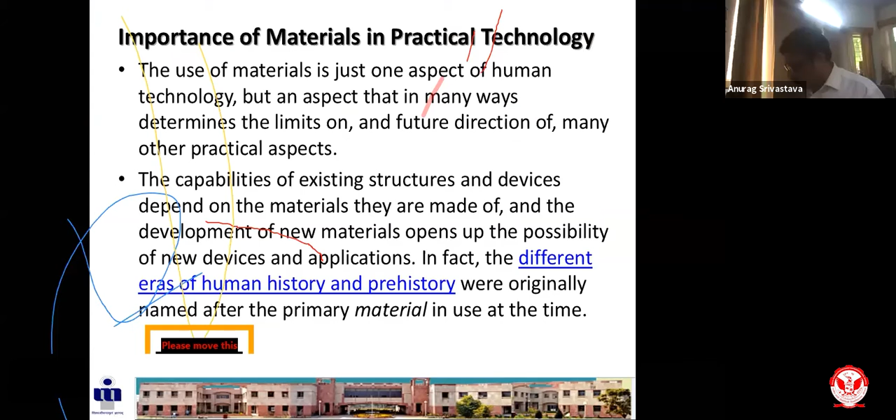If they open up the possibility of new devices, a variety of applications are possible. Going back to the history of materials by era, we talk about various stages: the Stone Age, where various developments took place, then the Bronze Age, with further material development, the Iron Age, the Middle Age, the Industrial Era, and now what we are in, the Information Age, where we mostly talk about one very important material: silicon. Now people are also thinking, can we replace silicon with some other material?

Everybody has talked about Silicon Valley, but people... it's going off, I don't know why.

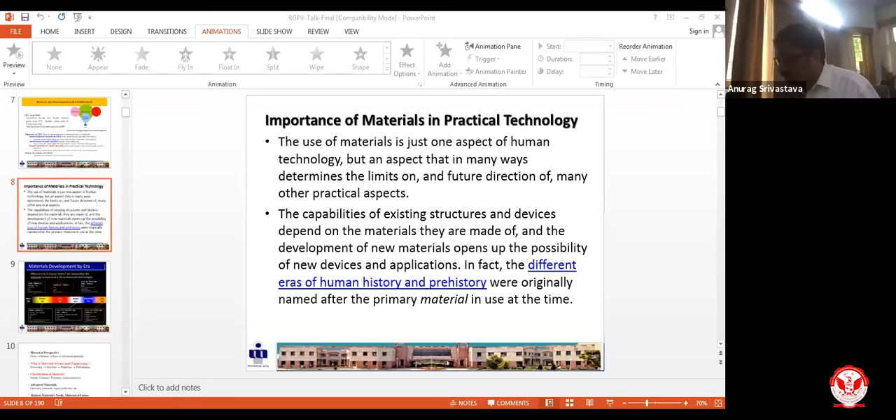So I was just talking about silicon. Silicon has been a very important and crucial material in the electronic industry, and everybody knows this, that's why people talk about Silicon Valley. Everybody knows that silicon was not the first semiconductor material discovered which revolutionized the world, but basically it was germanium. But people have realized the importance of silicon, and there are many technical answers for why people should prefer silicon and not germanium. Those from the electronics background understand very well why people prefer silicon.

It is basically the property of the material which leads to selection and suitability of a given material, and of course the availability of the material is also very important. For a layman, it's important to know that germanium is not easily available in the market in pure form, whereas silicon is available. This is a very layman answer for why people should prefer silicon. But the technical answers are that a variety of properties of silicon are responsible for selecting it in electronic device manufacturing, like its melting temperature, its breakdown voltage, and the thermal stability of the material, which is also very important.

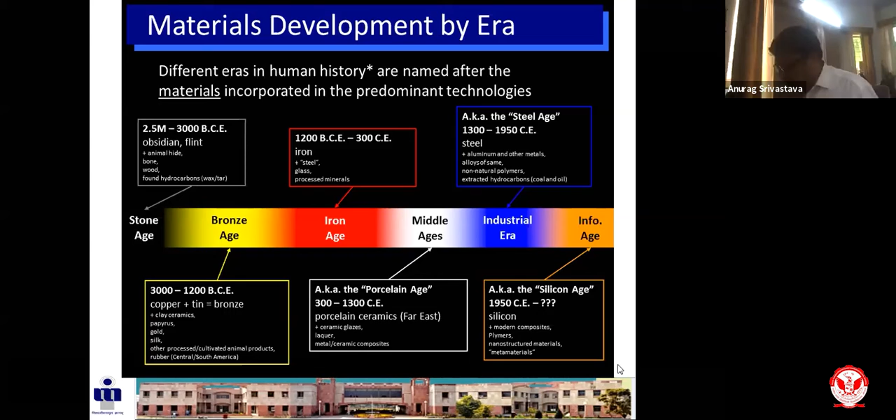So basically, as I said, you start with the Stone Age, move to the Bronze Age, move to the Iron Age, when you talk about steel and others, and now we have one bigger umbrella of material we call advanced material, or smart material, or these days other exotic names given to this material. But there are various things associated with the engineering of material properties as well. Various efforts have been made in processing the material, and in manipulating its structure. When you manipulate the structure, the property can be manipulated, and once you manipulate the property, the performance of the device can be tuned as per the requirement. So various materials are available, like metal, ceramic, polymers, semiconductors, and modern materials, depending on future needs, and you can categorize them in different ways. I have listed some here, like biodegradable material, nanomaterials, or smart materials.

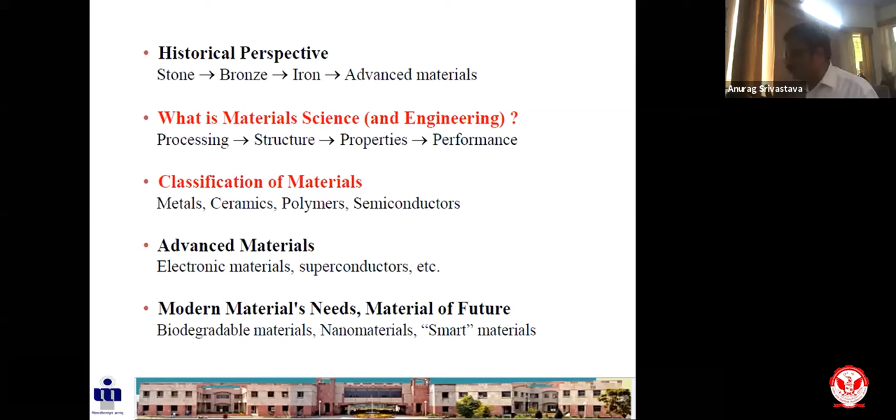Let's go back to the history: does history occur in a straight line? If you plot a change-versus-time graph, does it look like a straight line? No, actually it is not. It is basically in steps. So you have to start with prehistory.

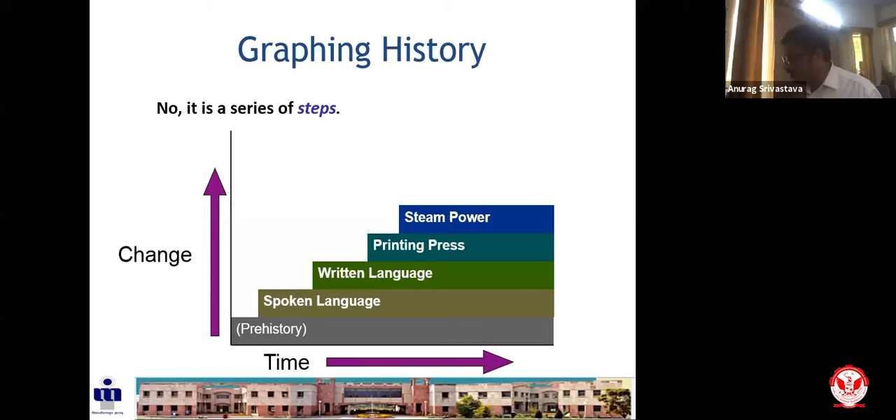People talk about the spoken language, people talk about the written language, and then there is the development of the printing press, and steam power came into existence. In the Industrial Revolution, the last 2 centuries have seen a series of steps. When after the steam engine, railways came into picture, automobiles, and people have seen how computers have been introduced around the 70s to 80s, where semiconductor materials played a very important role.

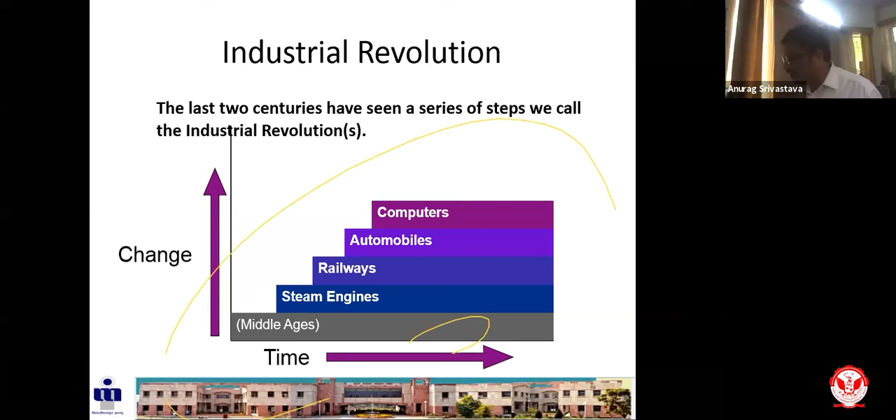If you talk about the Industrial Revolution, within that there are various categories of revolution. The first revolution took place in the steam engine, textile industry, mechanical engineering. The second revolution, from 1840 to 1900, was basically located in Europe, where railways and steel industry flourished a lot. The third revolution was electric engine, heavy chemicals, automobile, consumer durables. The fourth revolution is basically based in the Pacific Basin, California and Japan, where organic chemicals and computers were developed. Each industrial revolution marked a major change, a big step, which revolutionized social, political, and economic history.

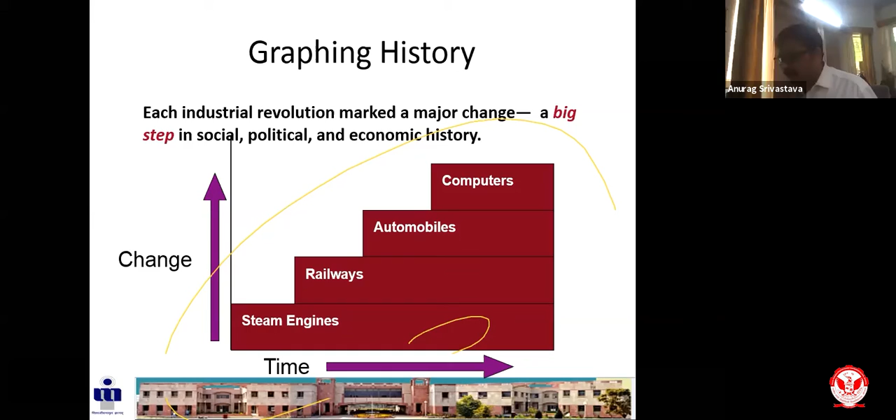So this is not a step function, actually. This has taken the shape of an S-curve, right? So it is basically a continuous variation of development that took place.

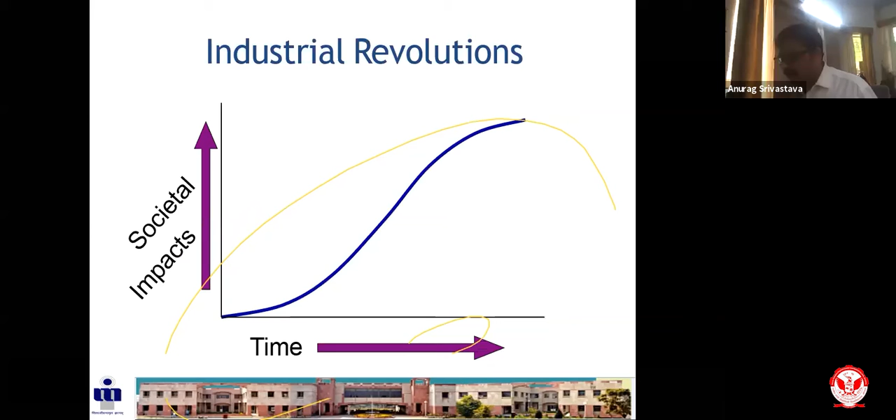The fifth revolution is basically around 2010, and it is still existing, when people talk about nanotechnology and molecular manufacturing, which is located mostly in the developing world - China, India, Brazil, and other developing countries, or countries moving towards developed nation status, mostly focusing on the nanotechnology and molecular manufacturing world.

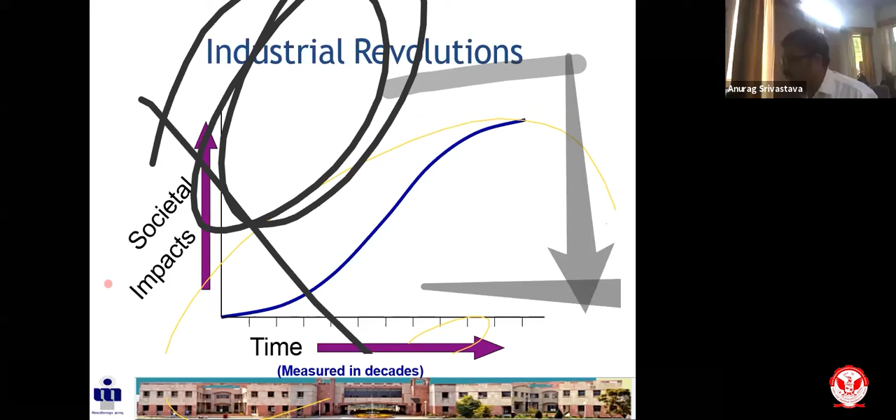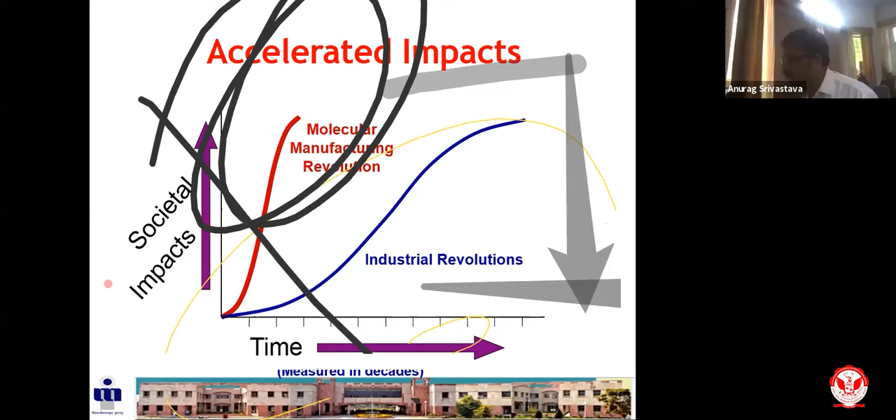This has not only changed industries, but has also impacted society a lot. That's why you can see it is again not following a step function, but rather an S-function. Molecular manufacturing has changed this complete world, and you can see in this graph a lot of societal impacts when people moved from simple solid materials to molecular and electronic molecular manufacturing. After computers, when people were mostly interested in solid state materials, now people have moved to molecular materials, or organic polymers, and have seen changes in the nanotechnology world even - that's what we call the next big step, and it has impacted a lot.

Someone is putting a scratch on the screen. I don't know who is doing that.

What is important here is why this nano world is so fascinating, why it is so important. It's basically that size matters, as I said, and shape - two things are very important. But the most important part is how many atoms are lying at the surface. The surface becomes very important, and that's how you classify material from bulk to nanomaterial. In bulk material, you don't find many atoms on the surface, and that's why the properties are different. When you move to the nano dimension, you find most of the atoms lying at the surface, and that's what this slide explains.

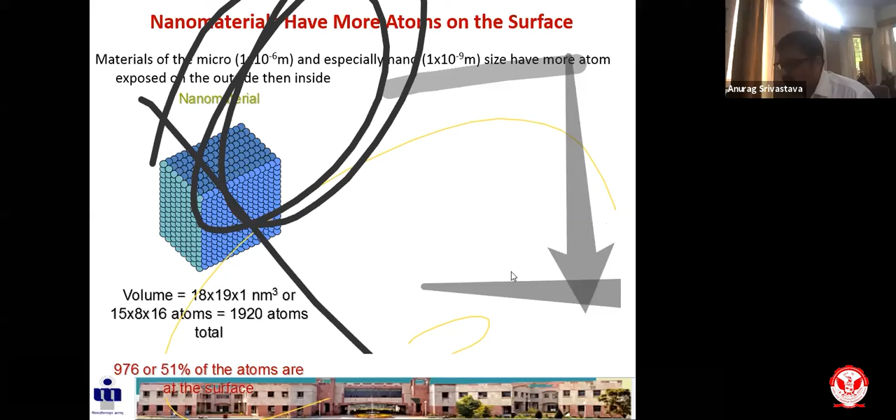That's why I said this dimension is so fascinating. This picture is not new, everybody knows it, and we have restricted ourselves to this dimension, 0.1 micro to 0.1 nanometer, right? That's how most electronics people currently are interested in working in this domain, and they have moved from microelectronics to the nanoelectronics domain - again because of the material. You can see in this picture, those who are already aware, who have already gone through the lectures of nanomaterials or nanotechnology.

They know this picture very well. This particular picture basically talks about how size matters a lot. If you just change the size of the material, the complete optical property of the material changes, and not only the optical property, but other properties of the material can also be changed because of that.

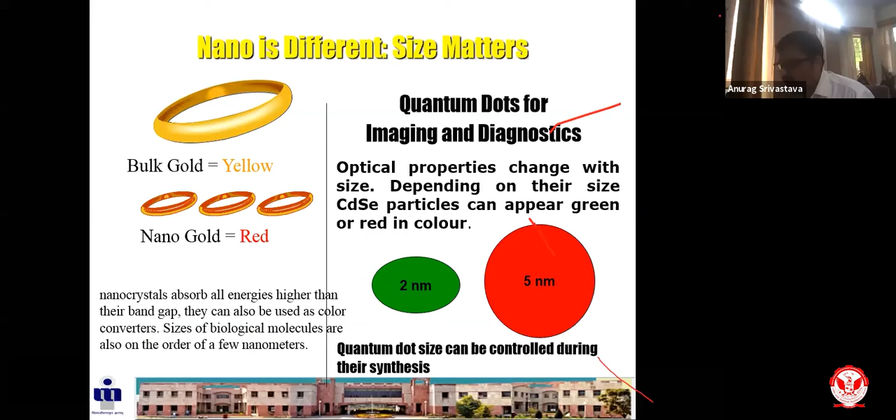Cadmium selenide was a very important material as a quantum dot, which has been recognized as a very good optical material, changing color from green to red, or red to green, just by changing the size from 2 nanometer to 5 nanometer. Similarly, bulk gold is yellow in color and nano gold is red in color, because many atoms lie at the surface, and that's how they change the behavior of the property of the material.

For example, in this picture, bulk gold has a melting point of about 1064 degrees Celsius, and its color is gold. If you keep changing the size from bulk down to 100 nanometer, the melting temperature goes down to 1000 degrees Celsius, and lambda max reaches 575 nanometer and 521 nanometer. If you decrease the size further to 20 nanometer, or keep decreasing it to 1 nanometer, the melting temperature reaches 700. So the material has become softer, from harder to softer, and the optical property also changes - you can see the colors changing.

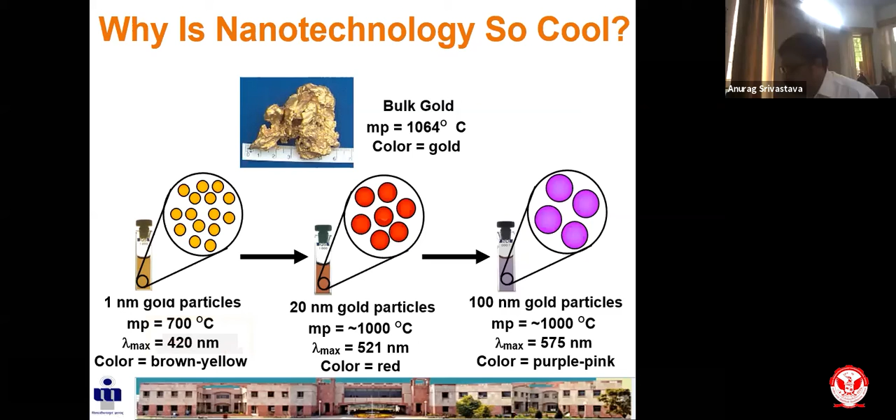This word is not new for biology people, it was always there for them. But for physics and chemistry people, or electronic people, they feel it's a new word because it has completely changed the electronics world.

We don't talk much about bacteria and cells here, but of course dealing with these atomic, nano dimensions, we can deal with the sensing of various cells, bacteria, and viruses as well. This picture is also not new, everybody knows it, so I won't focus on this part. The gist is that nanoscience and nanotechnology are truly interdisciplinary, and people from various disciplines can work together.

Whenever you talk about nanotechnology, it's mostly dealing with the design and construction of useful technological devices, and the size, as I said, is a billionth of a meter. Nanoscale devices will be built of small assemblies of atoms together, so you can call them at the nano dimension.

When you talk about nanoelectronic components, you talk mostly about transistors. Various levels of transistors you have studied in electronics courses - when dealing with FETs, field effect transistors, you are dealing with quantum dots, or silicon, or single atom transistors, or single electron transistors, or spin devices. People have moved to a different world now. Spintronics is another very important area, dealing with the spin of the material and how the spin influences the property of the material. You can also talk about superlattice arrays and many other devices that have emerged.

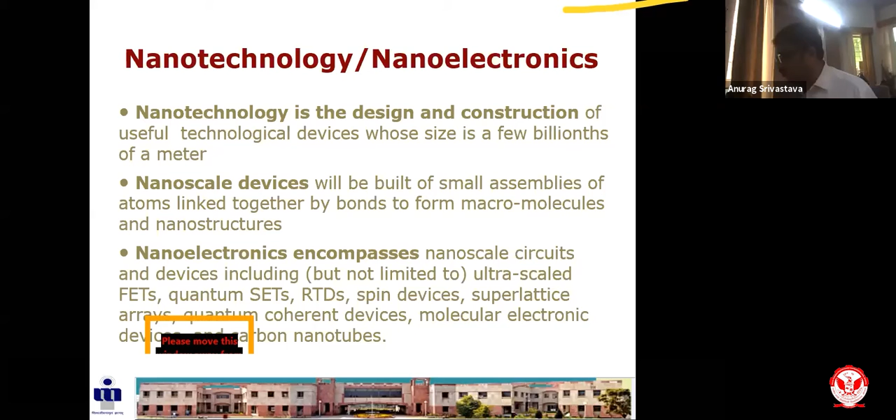So there is the motivation for this nanoelectronics world, because of the various limitations you've seen when talking about the scaling of devices - the physics changes from classical to nano dimension, to quantum. It becomes very, very difficult as soon as you reach the nano dimension, especially 10 to the power minus 10, to know which science or physics laws will be useful to describe the various changes in the material, and what other properties of the material change.

So you are moving from classical to quantum domain. When dealing with classical, you normally believe it's the era of 1984 or the 80s, when talking about diffusion of current. When dealing with bulk or silicon material, the motion of the electron was random motion, a random walk. As soon as you move to the quantum world, we normally talk about ballistic transport - meaning the time it takes to move from one end to another, for example from source to drain.

From one electrode to another electrode, it takes very, very small time, because during that time it also does not lose the energy. So when Professor Sunil Gupta was talking about the energy consumption should be minimal, people need to think about how they have moved from diffusion to the ballistic stage.

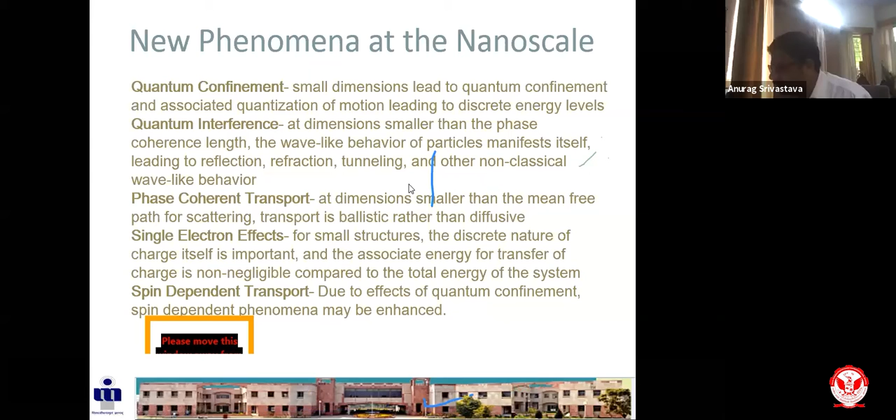So basically, a small chip has transistors of small size, and whenever you're dealing with a small transistor size, you are talking about the length of the channel. So the length of the channel becomes very, very important, and that has changed from micro dimension to nano dimension. Because of that, the phenomena associated with the micro dimension have changed, and people who were dealing with classical mechanics have started dealing with quantum mechanical things. So you are well aware of this good formula.

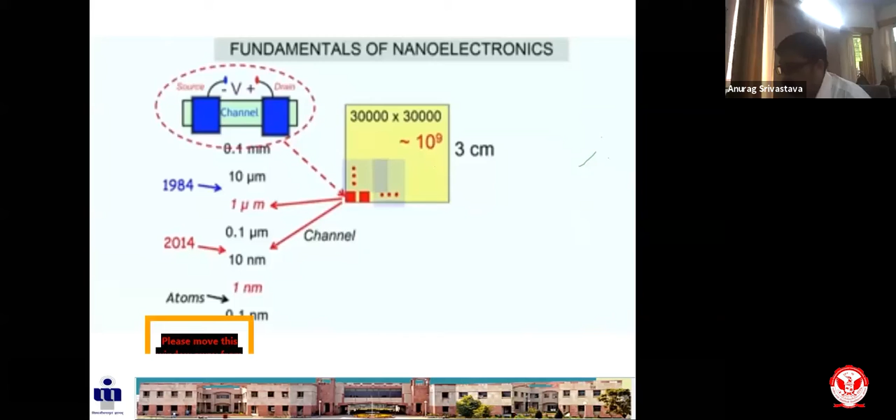People have talked about simple Ohm's law. When talking about resistivity, they talk about the length of the channel, the cross-sectional area. This formula is not new, it's a very, very old formula - everybody knows Ohm's law, right? But as soon as you move to the nano dimension, this law is no more valid.

So we have to think about other laws where the length of the channel plays a very important role, and the mean free path also plays a very important role. So L by lambda plays an important role. At the same time, as soon as you move to the quantum, nano dimension, this resistance is very important, where Planck's constant and the charge of the electron also play a very important role. This normally comes to about 25 kilo ohm. So this L by lambda becomes very, very important - that basically leads you from switching in the nano dimension to the classical, bulk dimension.

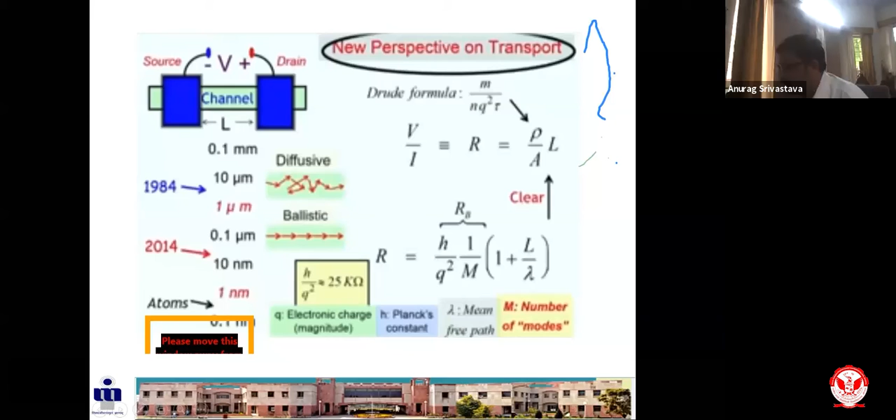As soon as you talk about the size, it basically changes the various properties of the material. It starts from physical property, it changes chemical property, electrical property, mechanical property, optical property. So you can exploit the variety of properties of material in a variety of applications.

Various initiatives have been taken by the Indian government as well as the government of US and other European countries, called the NNI, National Nanotechnology Initiative, encouraging new contributions that were not possible before. This initiative took place around 2000, covering people working on novel phenomena, manipulating the properties of material, and exploiting these properties in various device applications.

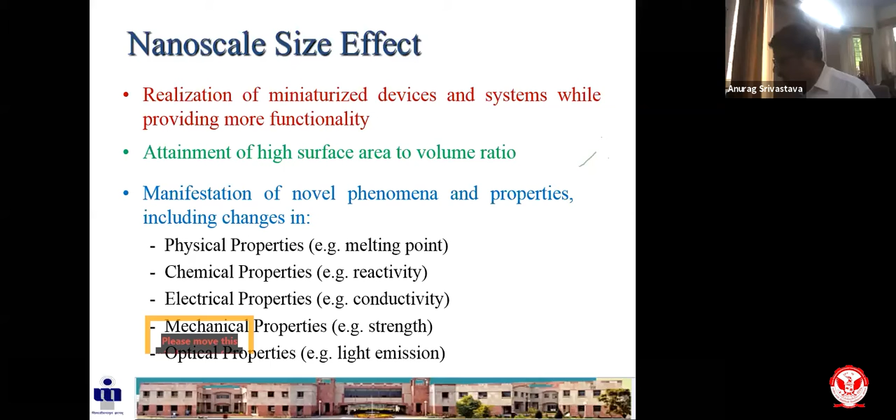Various discipline people have started working on this, but the role of physics, medical science, and chemistry people becomes very important here. That's how you can see a lot of technologies have been developed and a number of patents have been filed by a variety of people.

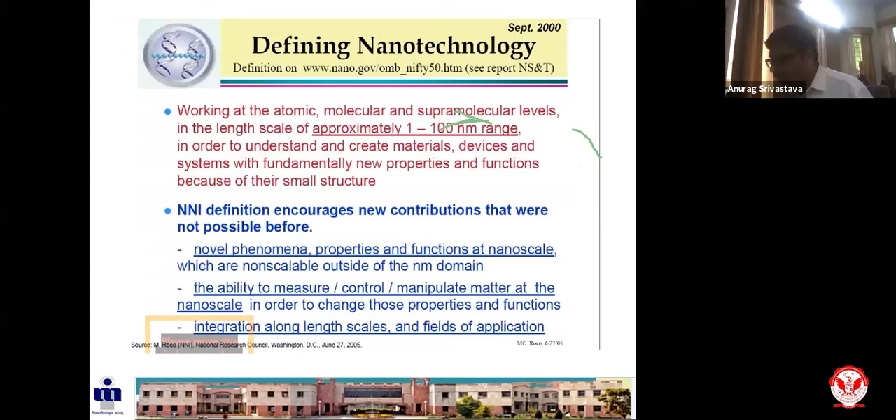Thinking of the decade from 2010 to 2020, you can talk about the various generations of the nanotechnology world: first, second, third and fourth generation. We have moved from third generation to the fourth generation, from nanosystems like guided molecular assembling, 3D networking, new system architecture, robotics or supramolecular systems, to mostly molecules as devices or components, where we are dealing right now with single electron devices or quantum dot-based devices, and that has revolutionized the field.

One very important component, since everybody is from an electronics background, they understand mobility is a very important factor. Whenever you move from solid material to organic materials, mobility directly gets affected, and you find a lot more variation.

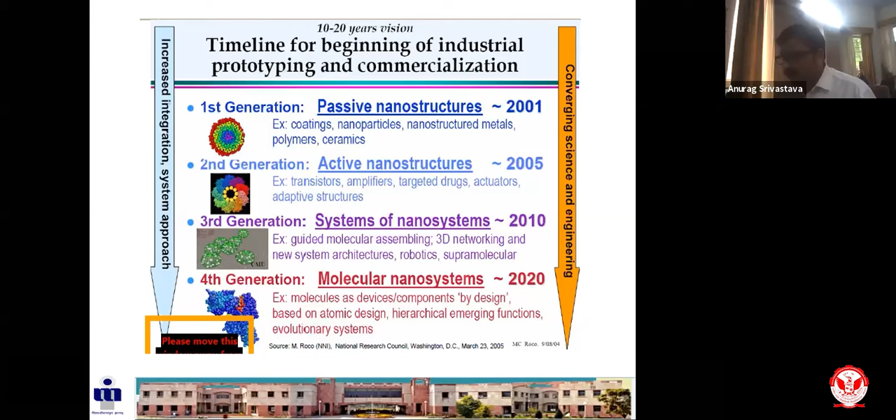A few years back, people started thinking about whether Moore's law is still valid, and at the same time thinking about whether silicon can be replaced with some other material, because people want to increase the chip density. Increasing chip density basically means many transistors, diodes, or other electronic components can be accommodated in a small chip of 3 by 3 centimeters or 1 centimeter by 1 centimeter.

So what they have done is transistor scaling. When you talk about scaling, you normally talk about decreasing the technology node, or the channel length. People have moved from the 90 nanometer node in 2003 to whatever is right now, talking about below 10 nanometers. IBM is working on transistors below 10 nanometers.

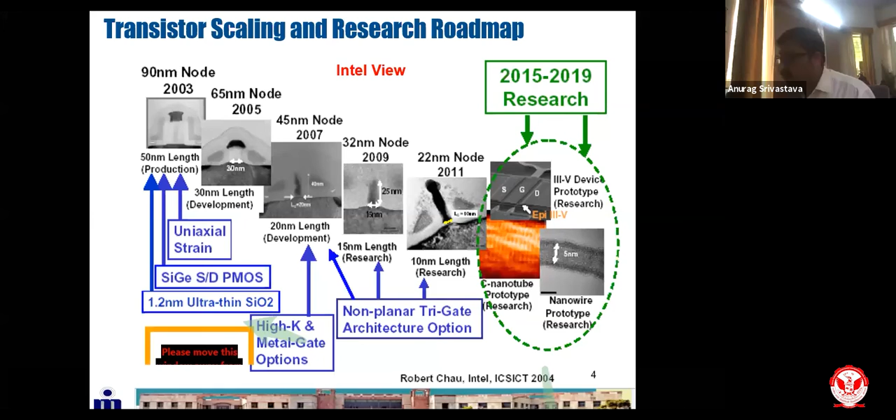They started with simple silicon material, then moved to the alloy of silicon and germanium. They worked with dielectric materials, high-K material, or moved to low-K material. Initially they were interested in low-K material, then moved to the 65 nanometer technology node. They again manipulated things, going to 45 nanometer with a channel length of 20 nanometers, and at the 32 nanometer node, they worked with a 15 nanometer channel length.

In this process, you can see that the miniaturization of the material is not possible anymore. So what else can be done in place of silicon? Other things can be done by replacing silicon with 3-5 compound semiconductors.

That was one option when gallium arsenide was introduced in the market, because the band gap of gallium arsenide was around 1.4 electron volt, while silicon is 1.1 to 1.2 electron volt. People believed that gallium arsenide may replace silicon, but it didn't happen, because the thermal stability of gallium arsenide was not good, and other properties of gallium arsenide were also not good.

People left the idea of gallium arsenide, and later people believed we could move to another material like carbon. That's why when we moved to 2010, graphene revolutionized the world. Actually, it was discovered in 2004, but it got the Nobel Prize in 2010. That's why people mark this year as the landmark year for graphene.

This carbon electronics is very important these days, because the same material in different shapes and dimensions can play the role of a semiconductor, a metal, or an insulator. So anything is possible just by playing with the size and shape of the carbon material. People have moved now to the current world of carbon electronics, instead of silicon electronics. They moved from silicon electronics to 3-5 compound semiconductor electronics, and now they have moved to carbon electronics.

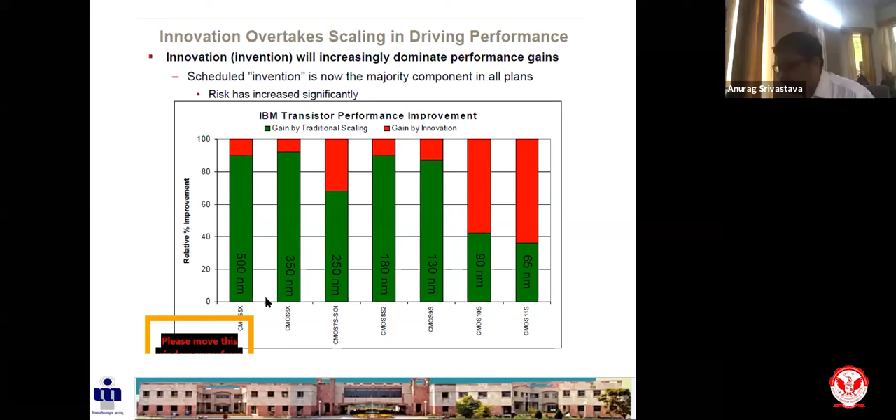So that's how we moved from having vacuum tubes around 1940, before the era when we started talking about semiconductors around 1950. Before that, we were mostly using vacuum tubes. Then we moved to other devices, semiconductor-based devices, which were dealing mostly with microelectronic size, micro size of the channel length. And now, from 2010 onward, we are mostly dealing with nano dimension devices as well as nano dimension materials.

So now the question comes that nanotechnology development cannot be decided only by nanotechnologists. Nanotechnology is a very big umbrella—it can accommodate people from physics, chemistry, biology. In almost every discipline, people can be accommodated under this umbrella.

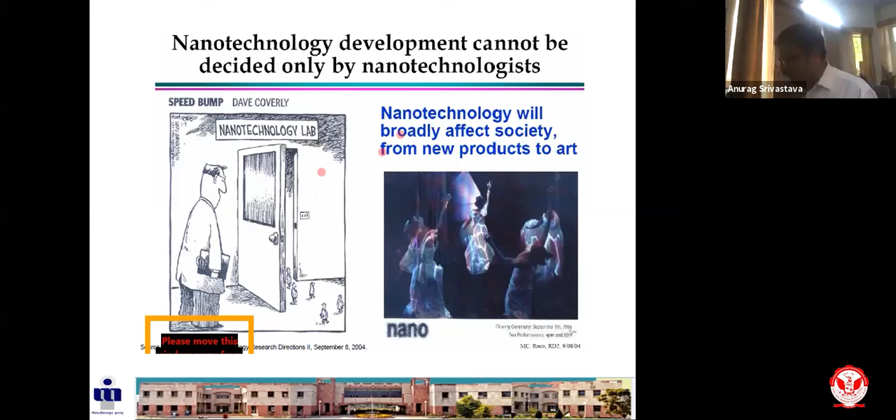So we need to focus more on the fundamentals. And when we focus on the fundamentals, we need to focus more on the physics as well as the basic laws of chemistry of materials—how the atoms are interacting with each other, what kind of exchange of energy, what kind of laws are there, how the atoms are joined.

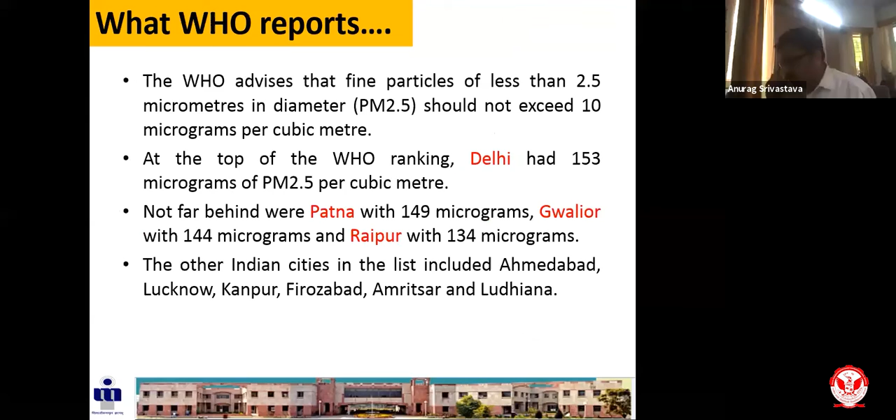So now, how do these toxic gases affect various parts of the human body? For example, various toxic gases present include H2S, which is a very important toxic gas, NOx in the form of NO as well as NO2, which are very important pollutants. Volatile organic compounds are also very important, and ammonia is very, very dangerous. Recently you've seen the news also about carbon monoxide and carbon dioxide, which are also very important, and many other gases are equally important.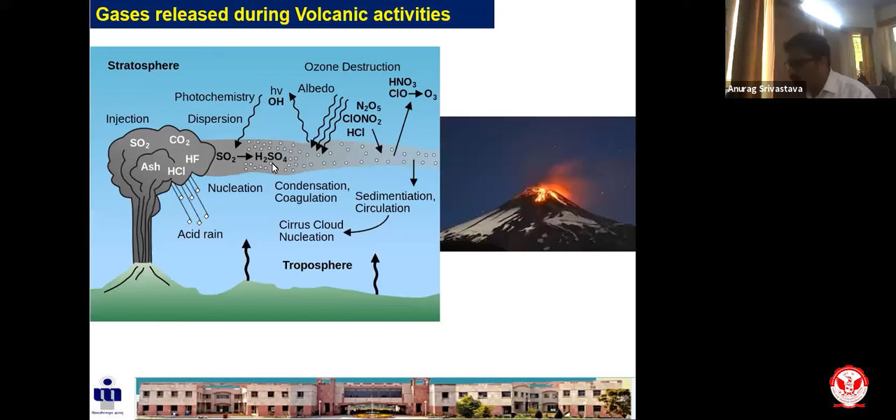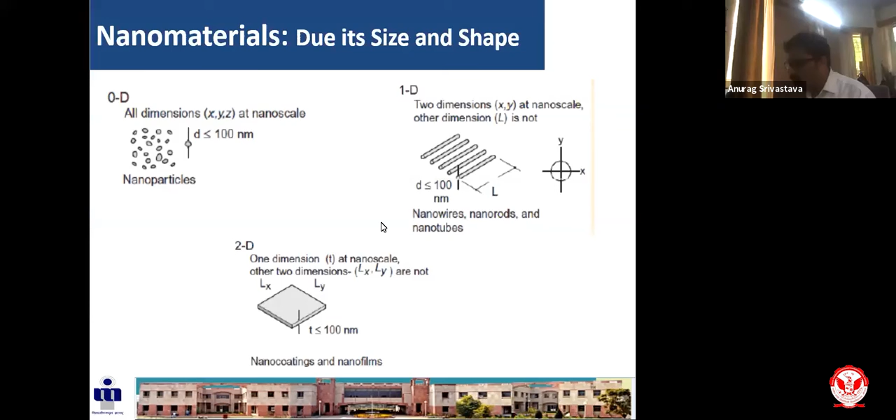When people were working on a variety of dimensionalities of material, they believed that 2-dimensional materials were not possible - they put a question mark on the stability of 2-dimensional material. But later, in 2004, when Andre Geim and Novoselov did the experiment, they found that this material is stable, with a variety of beautiful properties of the 2-dimensional material. That's how later on they realized that graphene can be considered the mother of other carbon materials, like 3-dimensional material, fullerene or quantum dot, or graphite itself, or the carbon nanotube folded in a different way.

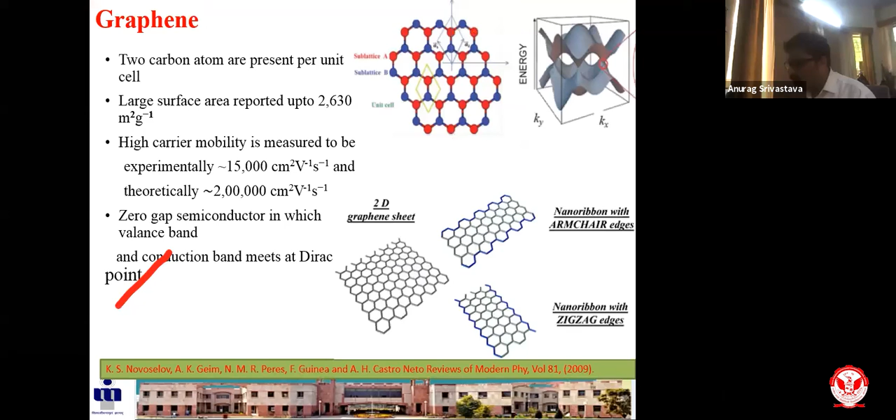So I'll not talk about this material anymore. Let's come directly to the second part of the material. Like, as I said, the 2D nanostructure graphene sheet is a zero band gap material. Normally people call it a zero band gap material, or sometimes a semi-metallic material. The structure is flat. A similar material is boron nitride sheet.

So whether the zero band gap is advantageous or not advantageous - of course it is not advantageous. Zero band gap material is not good, so you need to analyze the property of the material. We have found boron nitride is another very good material, which has a band gap of around 4.8 electron volts, but this band gap almost reaches the insulating stage.

And people have then worked on silicene, germanene, phosphorene, and other 2D materials. Of course, the structure of the material also plays a very important role - whether it is a flat structure or a buckled or puckered structure. That's how you can decide the property of the material in different cases.

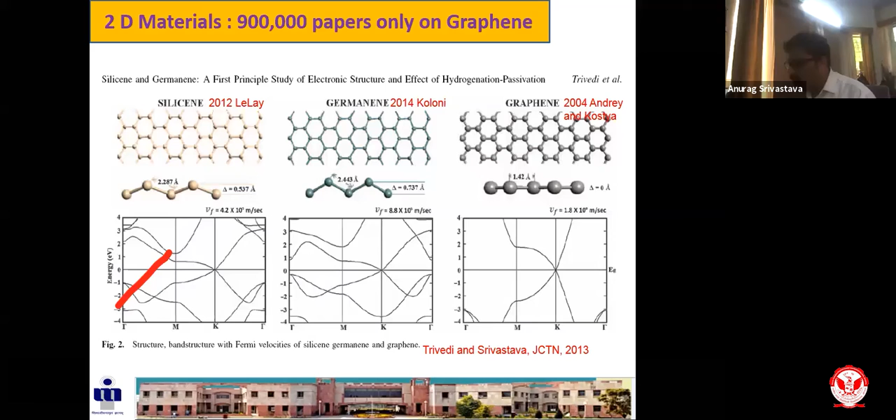Let me just come to the sensor part. So what is a sensor? Basically, it is a device that detects events or changes in a quantity and provides a corresponding output, generally as an electrical or optical signal, right? And your own human body also has a lot of components as a sensor.

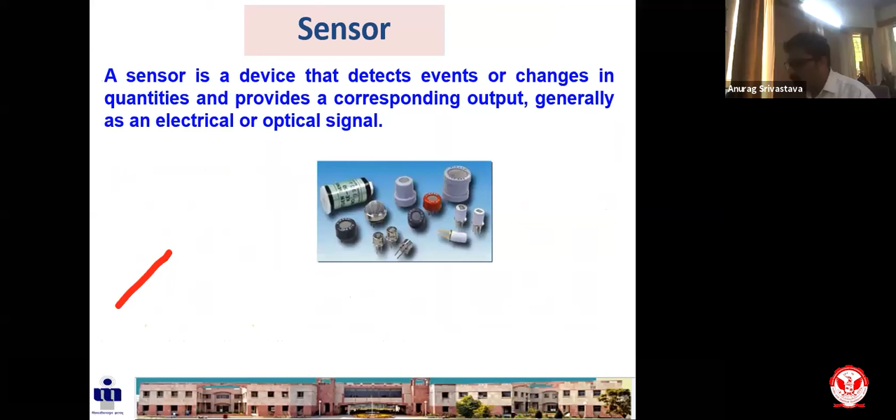You know this very well. So what you are doing when you are sensing, basically, is either seeing the changes in mechanical quantities, seeing the change in thermal quantities, observing the change in optical quantities or electromagnetic changes, or observing the changes in chemical quantities.

So if you look at it from the electronics perspective, basically you are more interested in the active region. Go back to that same device I talked about - we have got two electrodes, and in between there is a channel region. So we are mostly dealing with the channel region.

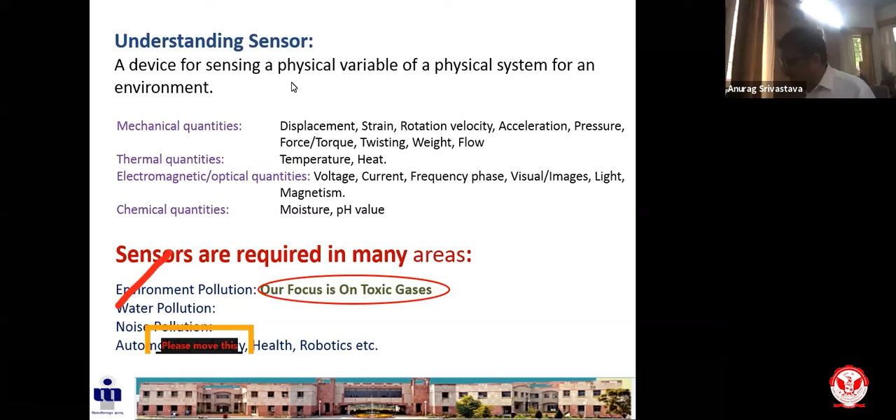So when gas approaches this channel region, what happens basically? It changes the signals, and how the signals can be analyzed basically through various data processing mechanisms that tell us about the presence of which kind of gas or chemical is present in the environment.

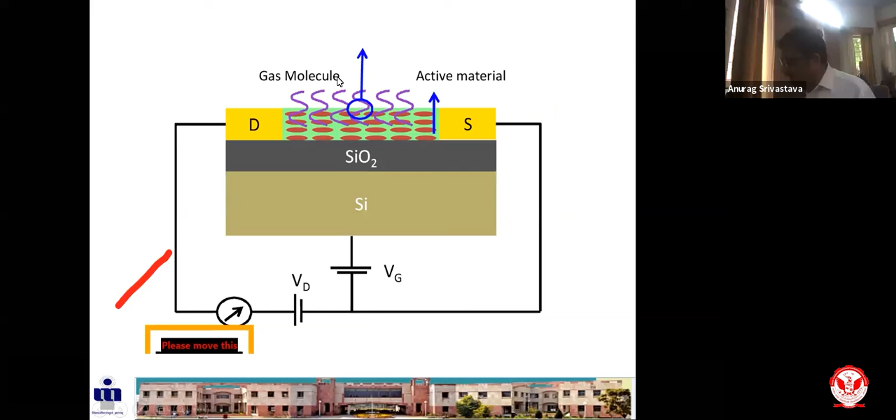So you can get the change in current because of change in the gate voltage, or you can get change in the current because of the presence of any extra molecule of gas or chemical near the active region, active material. But now the question is how to decide that the sensor you have developed is a good sensor or a bad sensor.

There are a variety of parameters for that, but the most important parameters are sensitivity - how much sensitive the surface is - and selectivity. For example, in a particular environment with n number of gases, for which gas is this particular material a good sensor? So selectivity is another very important parameter, and the thermal stability of the material, because it decides the lifetime of the device.

Other parameters are of course equally important, but these are very, very important. Another important parameter here is the response time - how fast it gives the change in signal.

A variety of materials have been proposed by a variety of scientists. They started talking about metal oxide semiconductors, the old one - people still work on metal oxide semiconductors, mostly oxides. People work on nanocomposites, people are working on polymer-based sensors, but at present, the current industry is mostly focusing on CNT and graphene-based transistor sensors.

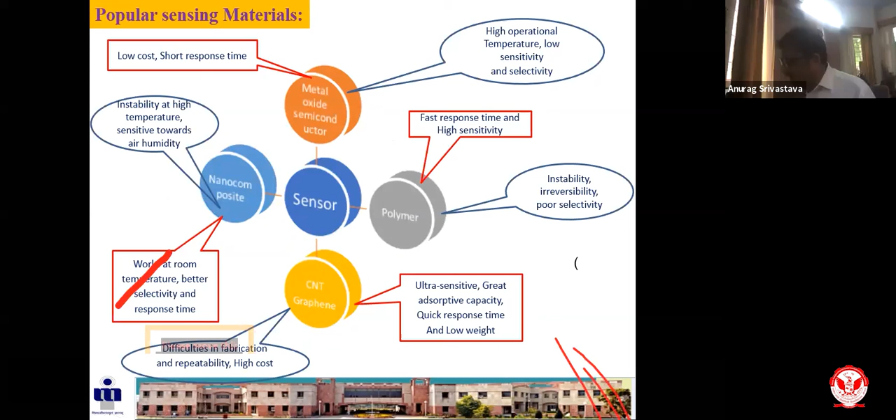Now, as a theoretician, what we do basically, the very first step, as I said, is that stability of the material becomes very, very important - whichever material you have to use. Let me just take one example of sensing hydrogen fluoride. You have to sense this hydrogen fluoride gas by using a simple CNT, and CNT can be manipulated in different forms - like you can have a simple CNT as a pristine or pure CNT.

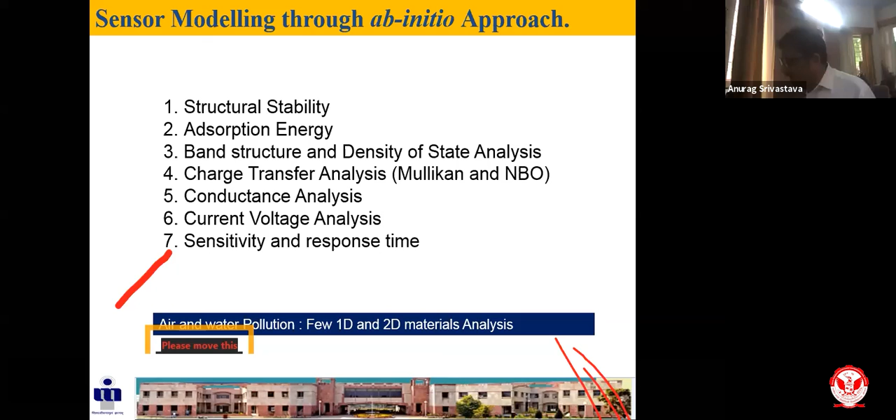You can have the functionalized CNT, making it a P-type or N-type CNT, functionalized in the form of, let's say, boron doping or nitrogen doping. And that's how the first thing you do, you make a geometry optimization.

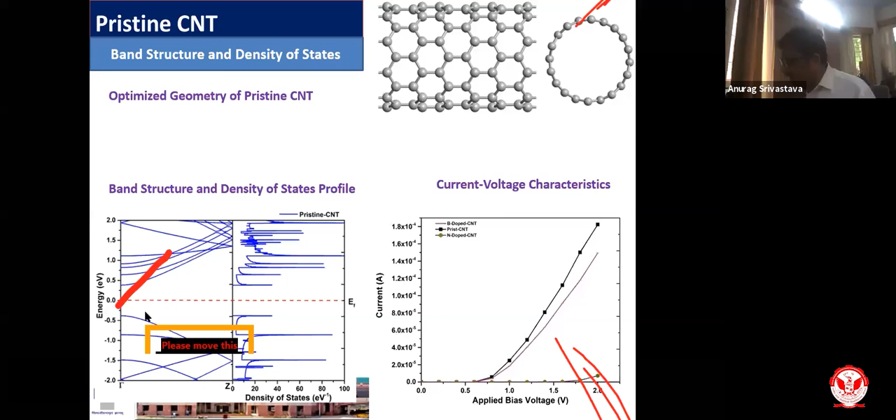In the geometry optimization, you are minimizing the energy of the system so that you can talk about the stability of the material. The second thing important here is to look at the band structure of the material. Through the band structure, you normally talk about the band gap of the material, whether it's semiconducting or metallic.

So ultimately, you are more interested in current voltage. Electronics people are not much interested in the material itself, that's more a physics interest. Electronics people, or industry, are interested in current voltage analysis, and what happens to device performance. But to manipulate the performance of the device, you need to understand how materials behave, so current voltage characteristics become very, very important.

In the earlier picture, you can see that the pristine CNT has one characteristic. For example, this curve belongs to the pristine CNT current voltage analysis.

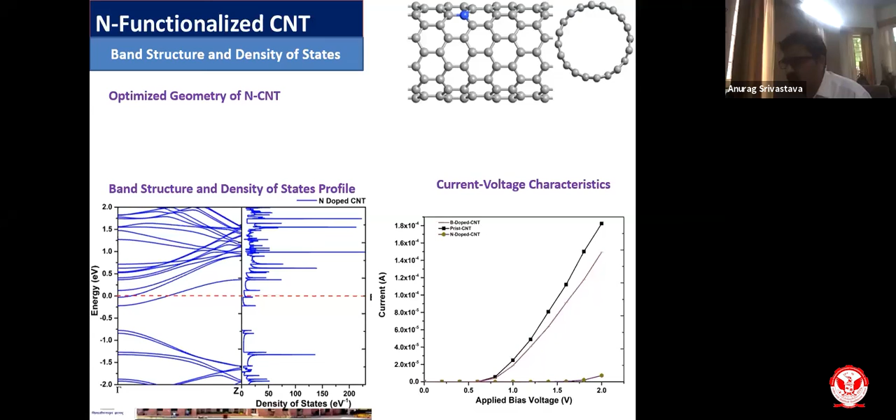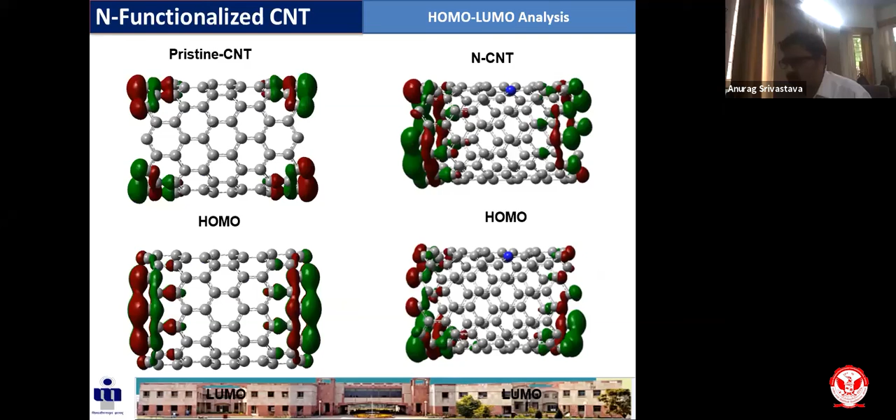Another important thing, whenever you are working on sensors, you normally talk about adsorption, whether there is chemisorption or physisorption. There are two ways: in chemisorption, the molecule present near the surface gets stuck to the surface. When it is separated, apart from the surface, normally you believe it is physisorption. Now the question is which one is advantageous and which one is disadvantageous. Both are advantages as well as disadvantages, depending on where you are going to implement it. For example, if you are interested in working for a...

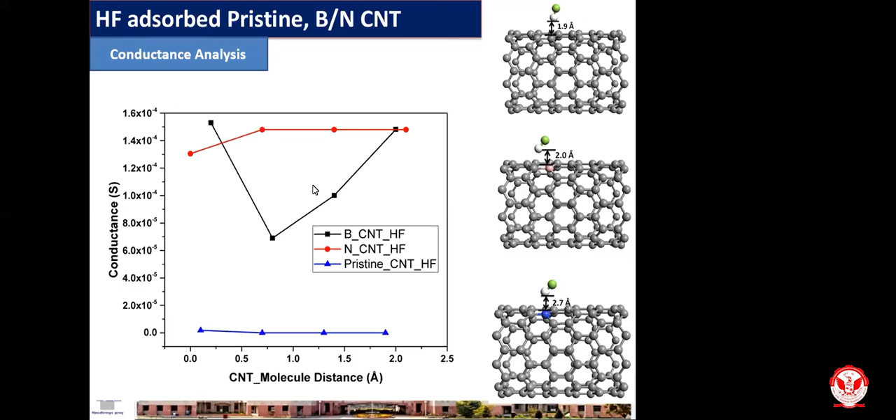In terms of the conductance, you are okay. In this particular picture, you can see the selectivity—when you have a variety of gases present, like hydrogen fluoride, cyanide, chloride, bromide, and sulfide, you can see how this particular device behaves and easily select. So this boron-doped CNT is good for what? Similarly, N-doped CNT is good for what? This is how you can decide the selectivity of the material.

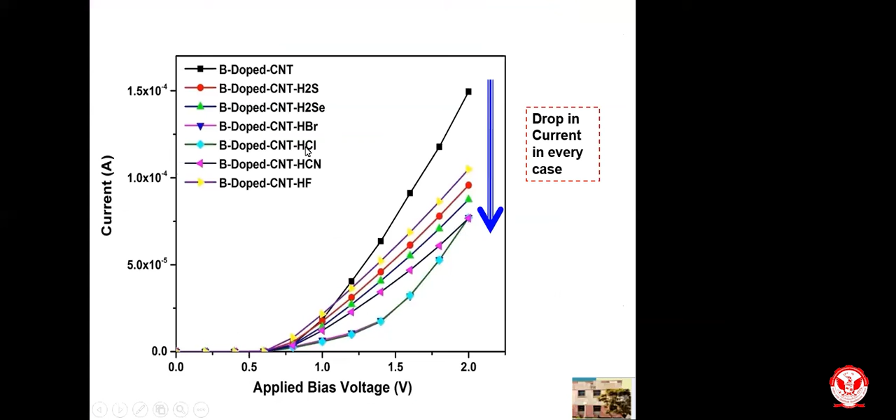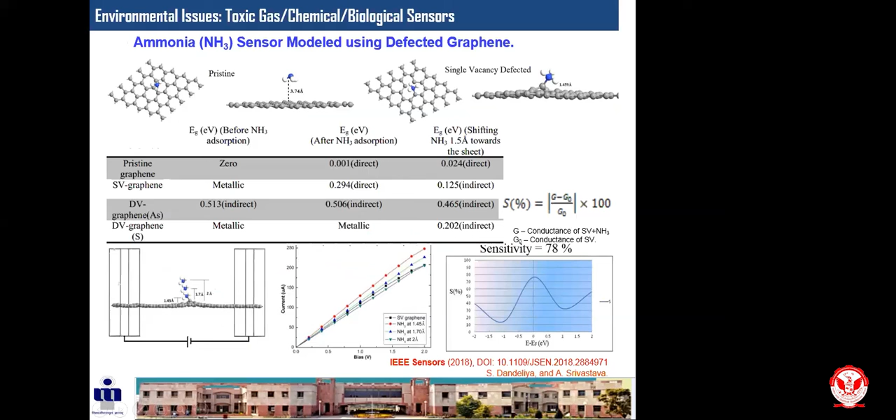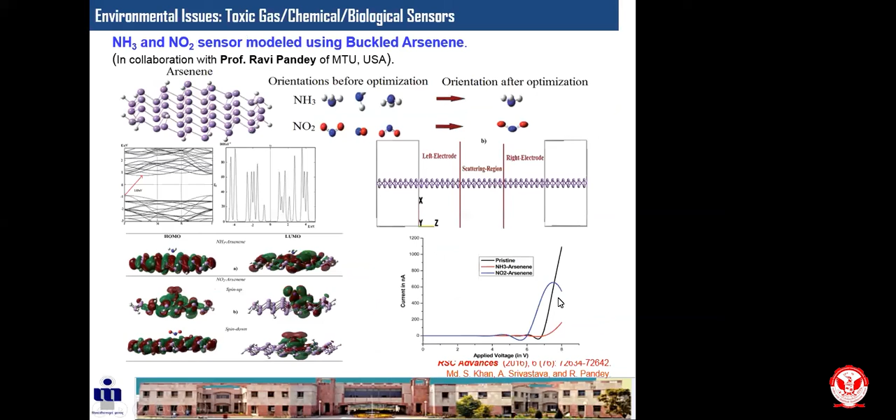Okay, so anyway, I think I should stop. I've said many things, but on the sensor part, I've said enough. So the idea is, those who are interested in working on sensors need to keep manipulating the material and look at how the performance of the device can be changed or improvised.

Another key factor is whether your device treats the intruder as a chemisorption phenomena or a physisorption phenomena. This is how you decide whether your device will work as a single-time usable device or a multiple-time reusable device. So the sensors which are good are less expensive.